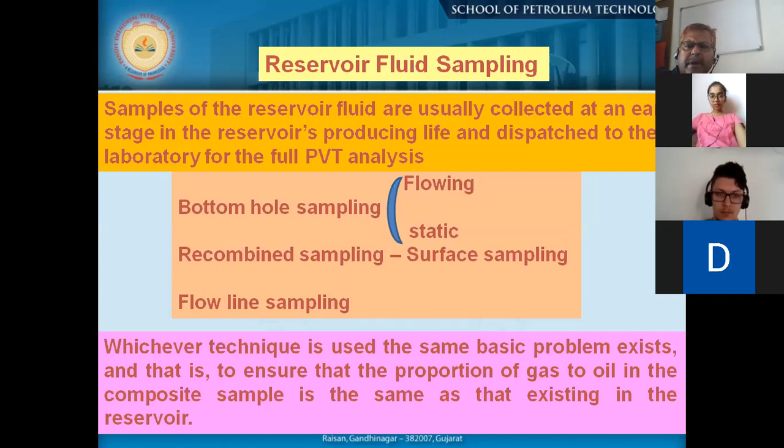So this is what we are collecting - how we collect bottom hole samples. One is during open hole. This is the formation tester, we have discussed this, but still some pictures are there, I'll show you.

As a geoscientist, you should not restrict your knowledge base only to geological understanding. You should understand as an engineer - you need to know what different activities are going on, because the core company may have different domains of expertise, but if you join a service provider company as an engineer, you should know the things in detail sometimes. Your overall understanding is very important.

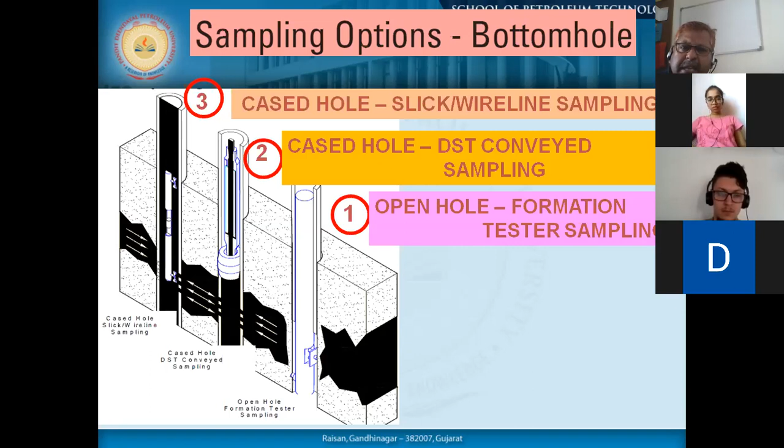So we collect open hole samples, we collect cased hole also. Now what is open hole sampling? I discussed this part in your last semester also, but I'm just trying to sum it up.

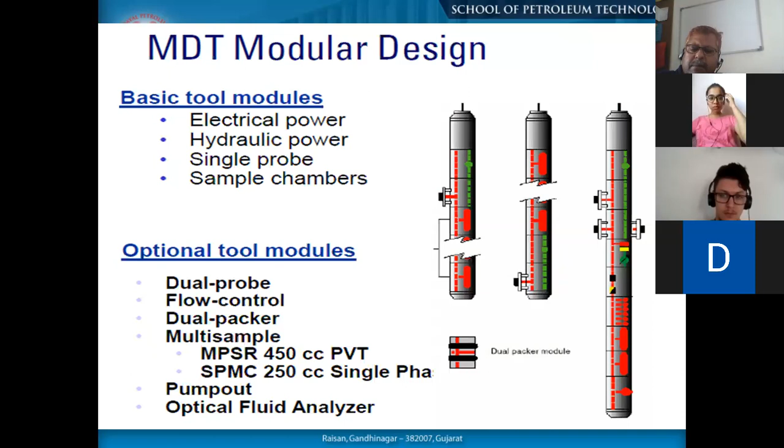This is actually your modular dynamic tester - the Schlumberger modular dynamic tester. These are module based, with a lot of complicated electrical circuits. We have the permeability measurement instrument, the pressure gradient measurement instrument, the PVT sampling, and bottom hole sampling. In the sampling figure on the right, you see so many sample modules in red - that means we could collect a lot of samples together when running down. This is the advantage of the modular dynamic tester, because we could even understand the type of crude present in the well. I'll try to show you that too.

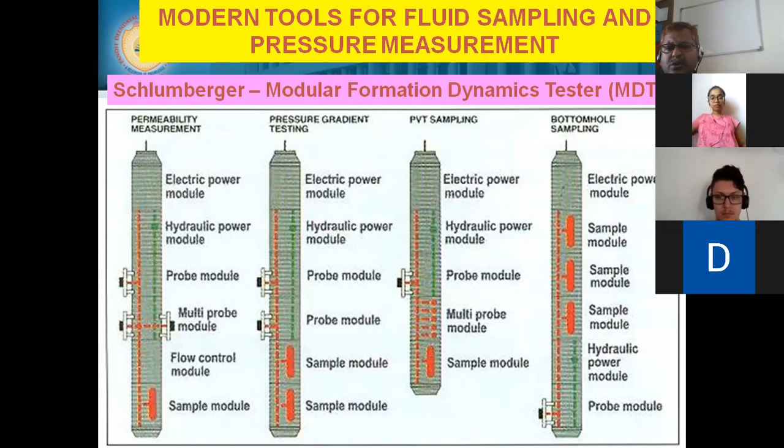So this is how you collect the sample. If you inject something into the fluid, that is called injection. This is called aspiration - aspiration means we take fluid samples from the formation. This is the domain where the formation is actually punctured, and your fluid will be collected. You have a strain gauge, and the CQG which is the quartz gauge to measure pressures, and you can test differently. I'll show you how we run this.

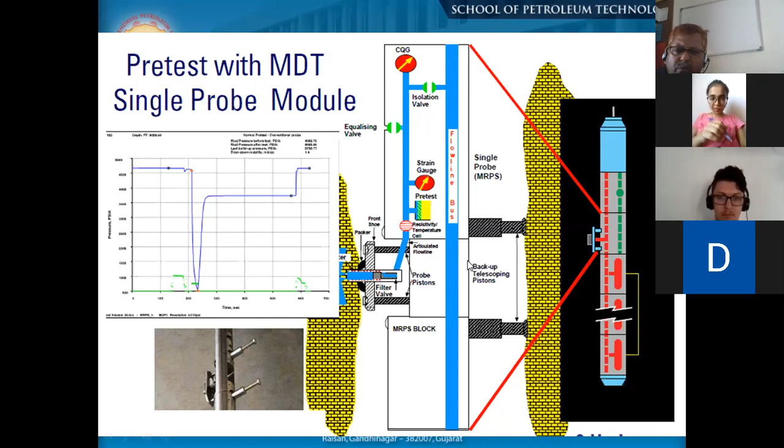So this is the multi-probe setup, meaning you may have a lot more probes. If you look at this figure, you can understand we have a formation, and we have different probes - horizontal probes, vertical probes - placed in different positions.

So when we collect some fluids from it, we get certain pressure response in other probes also. That gives us certain information about how, basically, when we are drawing down, how much actually is happening.

Hello Suman, is it audible? Yes sir. How many of you? Yes sir.

Okay, so this is what we do. This is a very sophisticated instrument, and the limitation of this instrument is you cannot test longer, and you cannot go beyond a certain domain.

So when we are testing for a very nearby area of the wellbore, what is the problem you may face? Any idea? Because during the drilling time we have damaged our wellbore surroundings, isn't it? So that means whatever fluid you are collecting may not be the proper fluid of the reservoir. You may be collecting a mixed fluid.

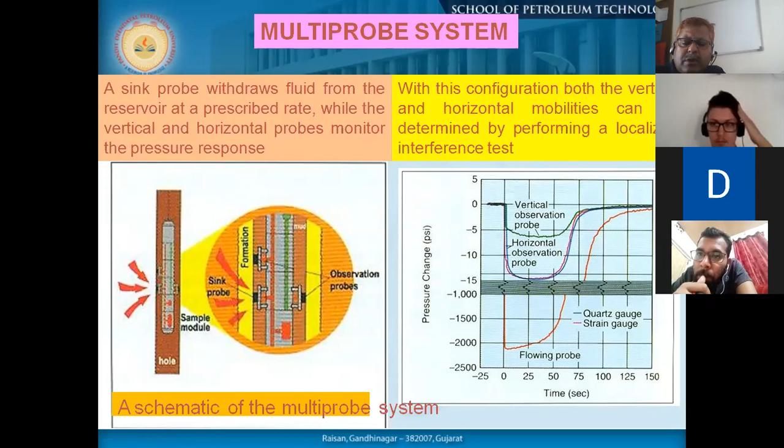That's why we have different modules also. This is called the pump out module. In pump out mode, you can get the resistivity value of the fluid entering into your instrument, and you can discard the samples. You can divert it into a sample chamber, but that you could do.

So in order to recover PVT quality samples, remember the samples we are collecting are not just for sake of sampling, it's for PVT. That means you need to know the proper PVT phase envelope, phase diagram, behavior, composition, every parameter.

So that's why through the resistivity measurement, we try to know which fluid is entering. How do you get this resistivity information? We have some resistivity sensors there.

And how do you distinguish whether the original fluid of the reservoir is entering, or we have some invaded or mixed fluid? Because we know the mud resistivity, isn't it? When we are drilling, we know the mud resistivity. So once you find the resistivity more or less similar to your drilling mud, that means the fluid entering into your sampler is not the proper reservoir fluid.

Okay, I'll just show you another diagram that may give you this. It's not there... okay, some resistivity values are there, one graph is there. It's not here, okay, but the resistivity values are there.

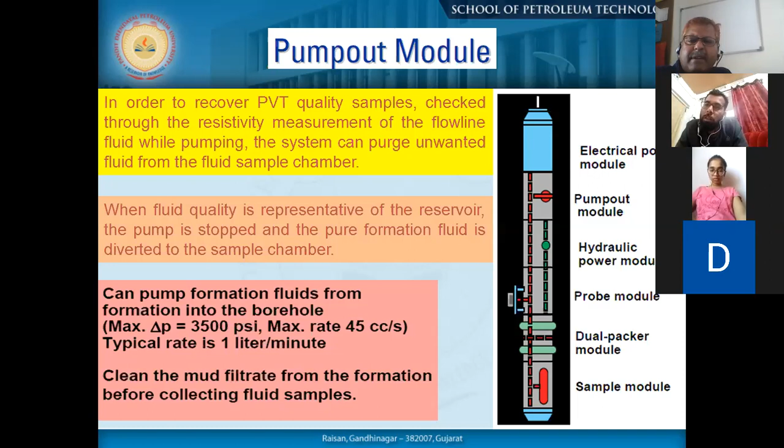So this is something you people may have to decide, because when you work as a well site geologist, the reservoir people may come to the field. Even today, if you ask somebody at the drilling site what is happening when this sort of instrument is lowered down, many people say, oh, the bottom hole party is doing something. Most people don't know what activity is happening or what information is being gathered.

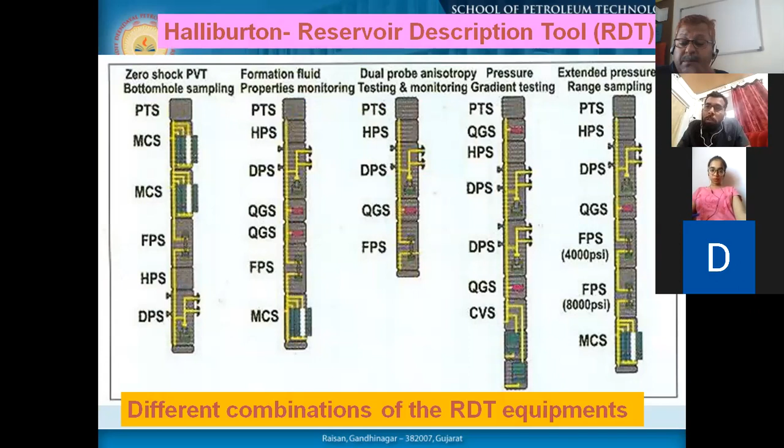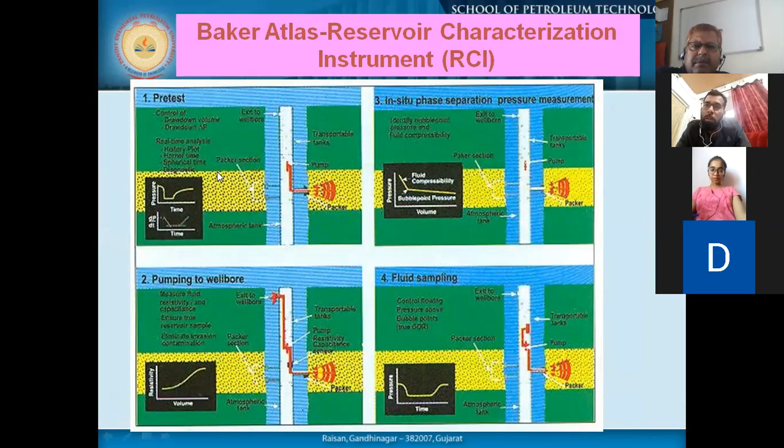So now here you can see all the tests, pre-test, before that the four diagrams are there. Then in situ phase separation, pressure measurement, you can get the pressure variations, because I told you we have a lot more sensors there, isn't it?

Okay, in the same instrument, on the right side, you have inserted your instrument into the formation, and now you allow the formation to flow in, and accordingly you get different pressure responses. That gives you the idea of, you see here, the last one is fluid sampling. So you are sending your fluid to the chamber.

So that means you need to take a call from the surface, because this will be displayed online on your screen, or maybe on the truck, which already has built-in computers, everything would be there, so that you need to monitor and take a decision. Now I should trap my samples in the full chamber. Got it? So this is what we do.

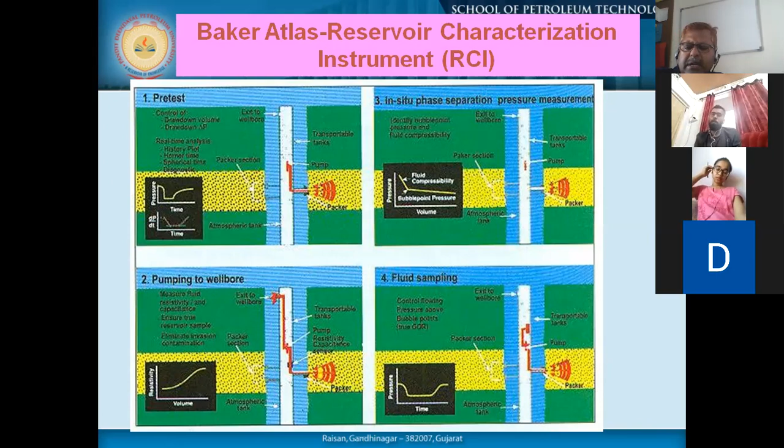Yes, and okay, so now a few things are there. I just didn't put it here. So now we could analyze the fluids also online by using spectroscopy. That is light oil, heavy oil, everything we could do. If you are interested, I have a book, I can send it to you. Sampling is the most complicated part. This generally I taught to the reservoir people, but if you are interested, I can send you all the materials.

Okay, so this is above surface. So now what happens after that? Once you collect with the modular dynamic tester, what is next? Because the modular dynamic tester is for open hole, if you remember. We case the well, cement it, then perforate it, and stimulate or activate it, and allow the well to flow. So now this is the setup.

Have you ever seen a Christmas tree? All yes, sir. Suman, have you seen it? No, sir. No, sir.

Okay, so this is actually, you have two zones. One is the production pipe going to the top, and another, you see, one side pipe is going, that is actually the annulus opening. Annulus, or maybe sometimes. So this is what is there, different valves are there. I don't know your production part, maybe it may touch upon this part after drilling and completion, isn't it? Hopefully so, you just have an idea, because you must know this, you never know when people will ask you a question. Even in an interview board, you cannot say that you haven't studied this.

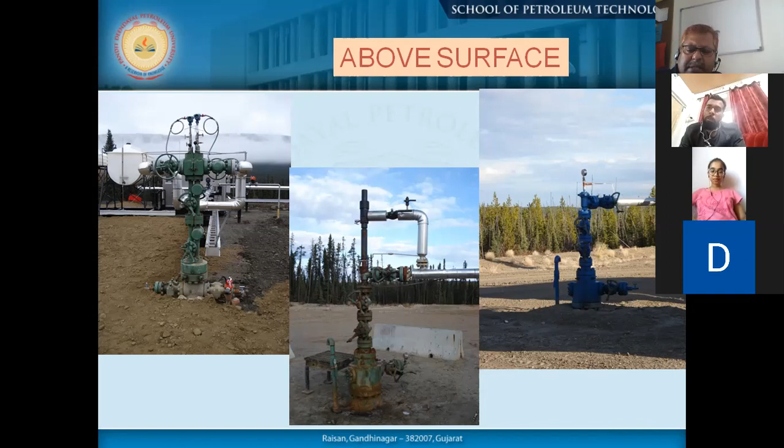Okay, so this Christmas tree, once above that, then what is done? So this is what we discussed earlier. Because once you allow the well to flow, the modular dynamic tester will collect only a few samples, not very suitable for the PVT study, because the sample amount is very small. So then we go for bottom hole sample collection.

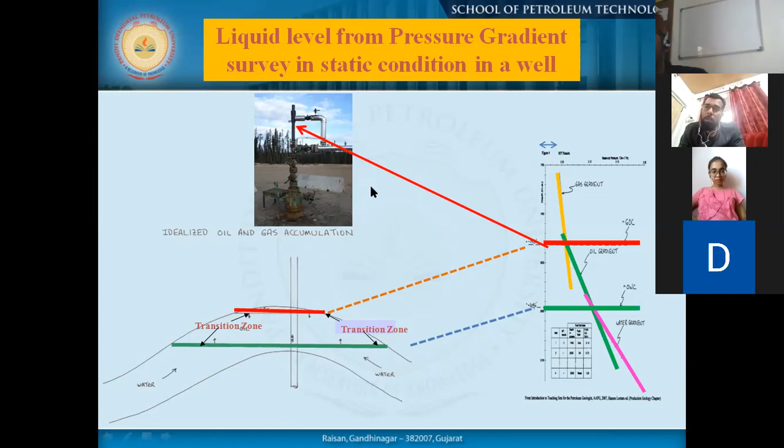Who generally does it? Who generally does it? Okay, so this is generally done by the reservoir people. So now this is subsurface collection of fluid samples, this is what is there, a sampler. I will try to send you another picture, because yesterday I was just searching many things and I got a few pieces of information.

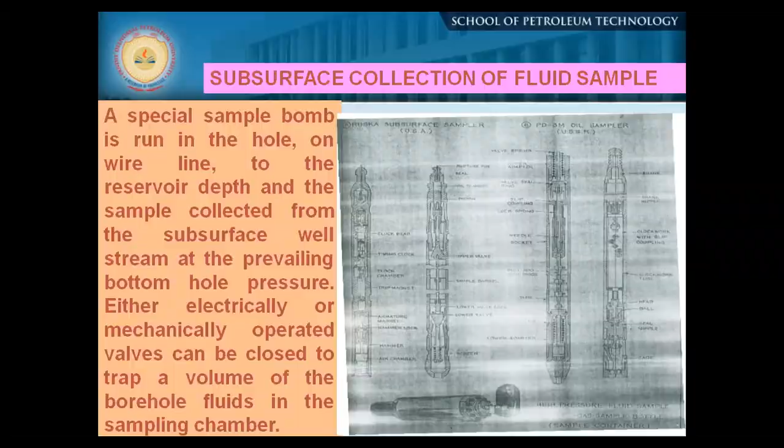Hi Abdul, why are you not visible? Yeah, now it's visible. Yeah, so some problem whenever... okay, visible now. Hello. Hello. Hello. Hello. Say anything. I can't see you, is it visible now? Yes sir, I don't know what is happening. Sometimes the data, overuse of data or something is showing, and that is going out.

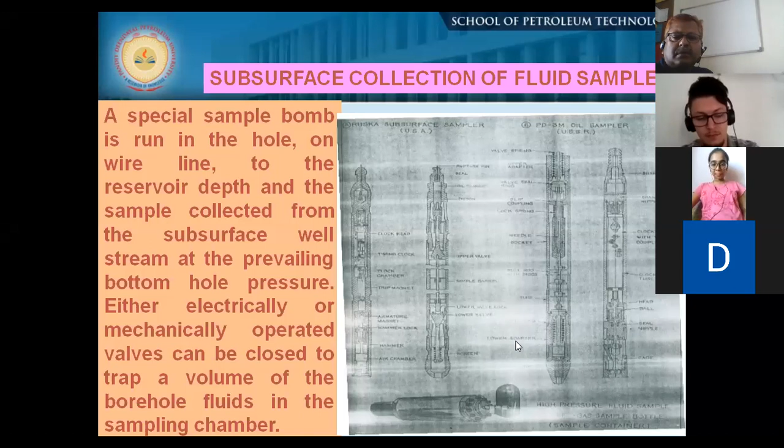Okay, so now the sample part. Then what do we do actually, in sequence. Okay, this, stop sharing.

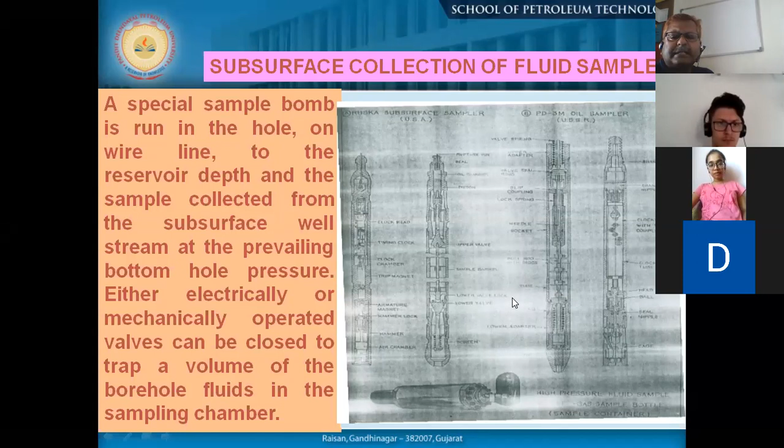Now, how do we test it? Any idea how we collect the samples? Okay, so this is actually the sampler. If you see, this is a mechanical sampler which I used when I was in ONGC. But I got a little information on an electric sampler, yesterday I just found out a few details, so I'll send you all that. So how do we collect the samples? Just anybody? Anybody? So what is the step for collecting a sample, a subsurface sample?

So what we do actually, initially, let's say this is the well, and this perforation is already there. Is it visible? Yes, sir. Okay. Now on top, this is a Christmas tree.

So we use our winch van. Here is the truck. And from the truck we have the drum, where we send through what is called a lubricator. Hopefully the pictures are there, I'll show you. Lubricator.

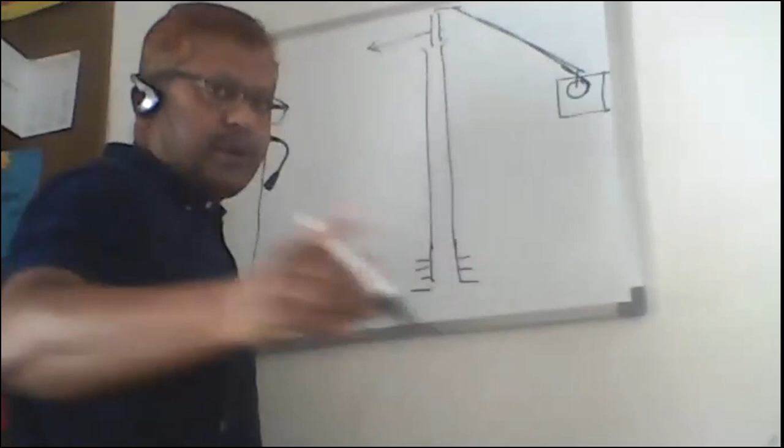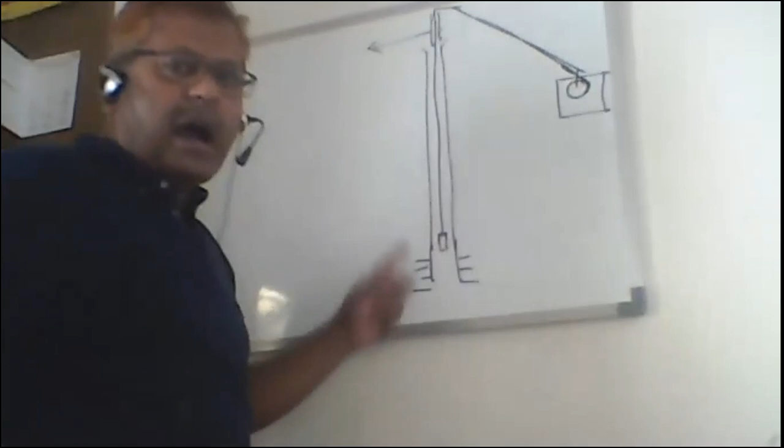Through it we lower down our instrument, the electronic memory gauge, up to a certain depth. How do we lower it down? In a very specific manner. Let's say I just set the time, and I lower it down.

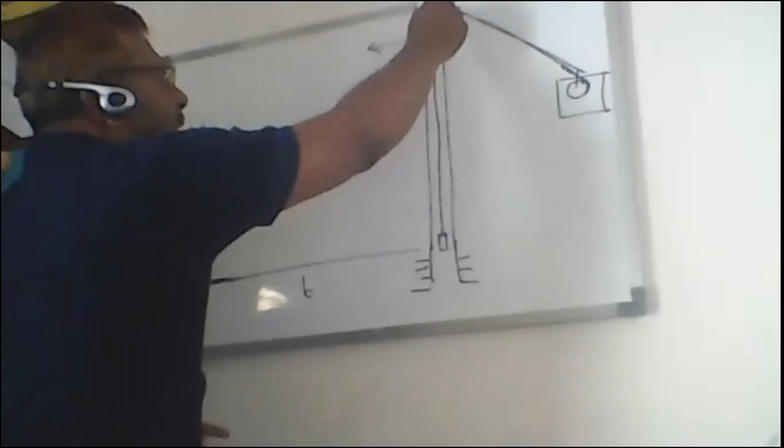So I just set the instrument first, then I lower it down slowly. Initially my pressure is like this - this is actually the pressure value. Now initially, before lowering, my pressure is 0.

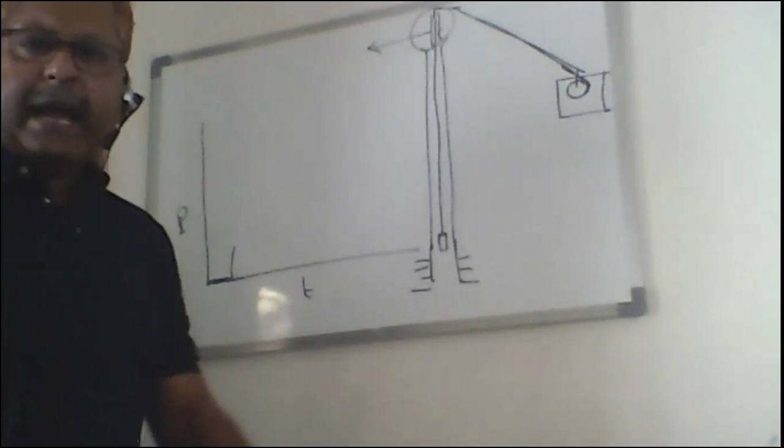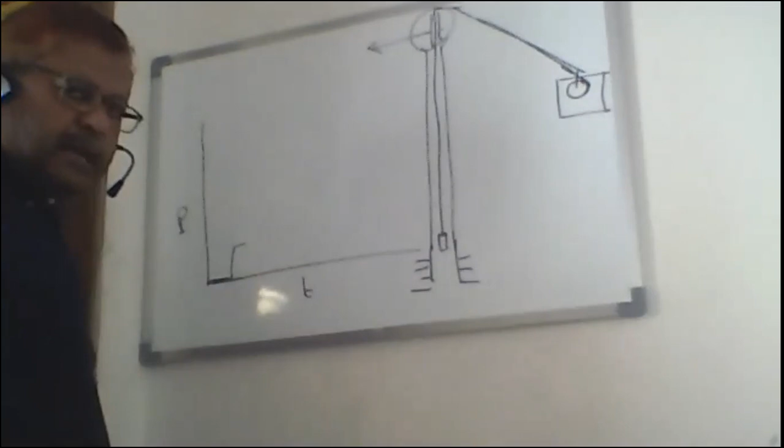Now suddenly I lower down up to 100 meters, and I keep it for 1 minute, and the clock will be running in this direction for 1 minute. Then I again lower down 200 meters, stop for 1 minute. Again I lower down. So like this, I lower down up to the desired depth.

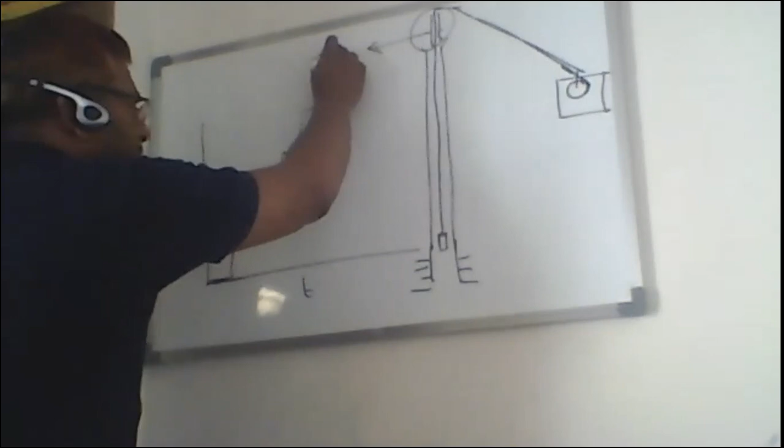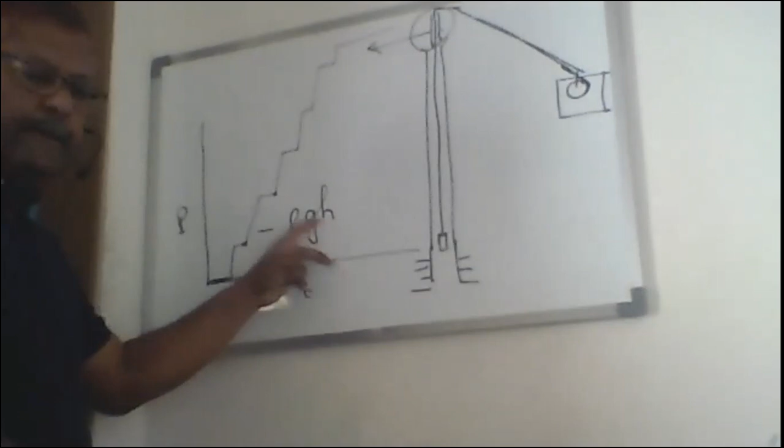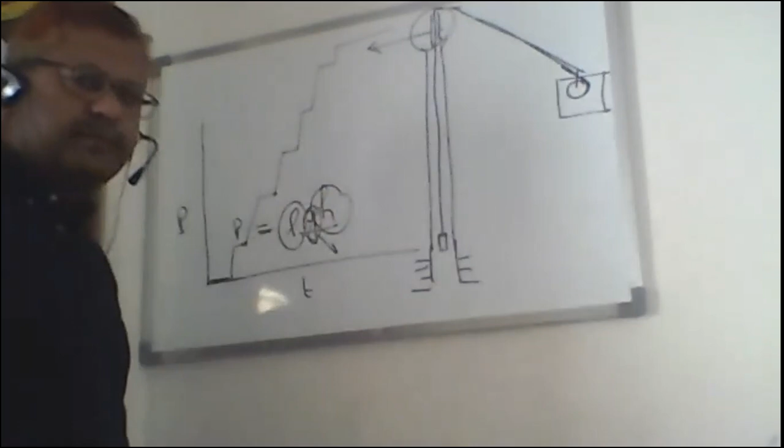So what is the value? Pressure? This is Rho, G and H. So that gives me - I know the H, I know the total pressure value measurement. So G is fixed, so I can get the Rho. What is Rho? Density, fluid type. That means if it is lighter, then I get the fluid.

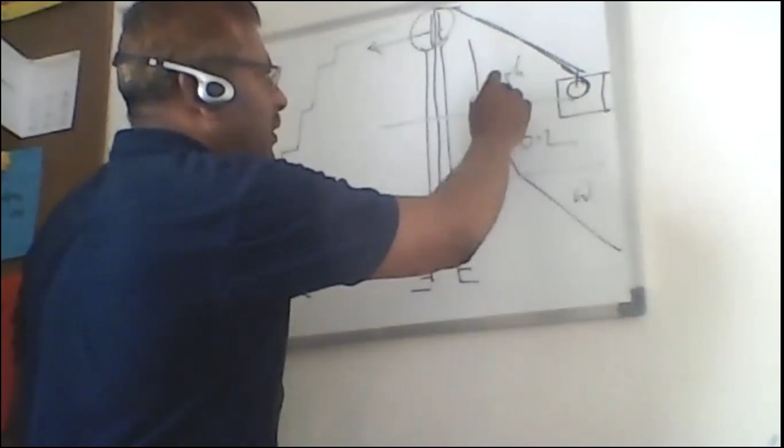So on that basis, I try to get this information in the well. So this is very less Rho, intermediate Rho, and high Rho. Rho GH - this is very less, this is gas, this is oil, and this is water. Got it? So this is how we try to get the information.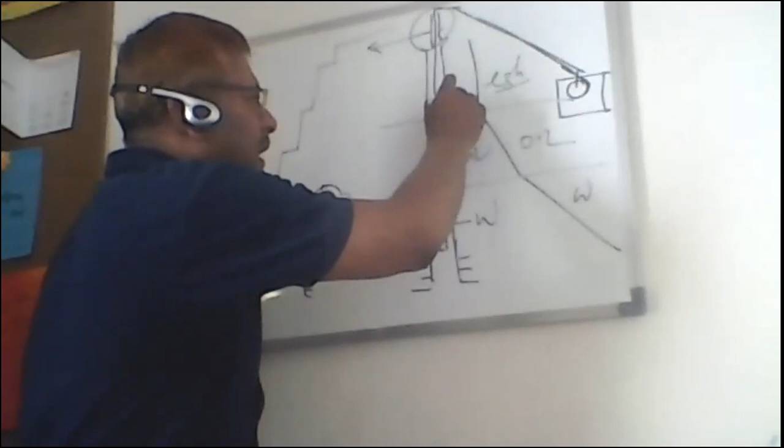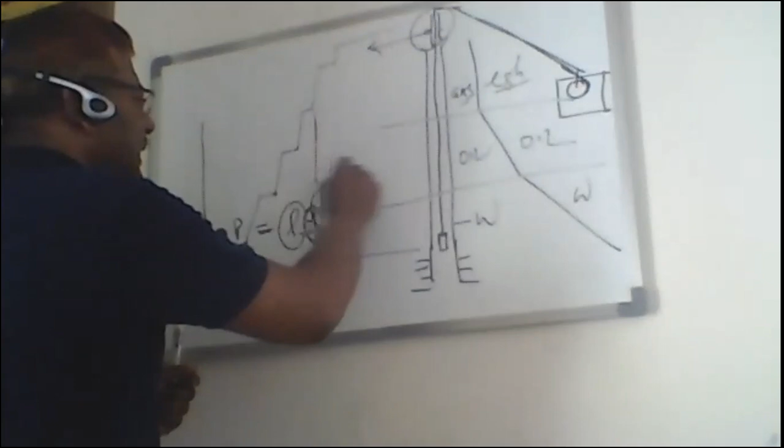Where is my water? What is my oil? And where is my gas, if it is there? If the THP, tubing head pressure, is more than your bubble point pressure like this, then... no, more than bubble point pressure means, let's say if this pressure THP, tubing head pressure, top pressure is here, so definitely you will be in single phase, so you won't get gas here, isn't it? Because gas has not evolved up to that.

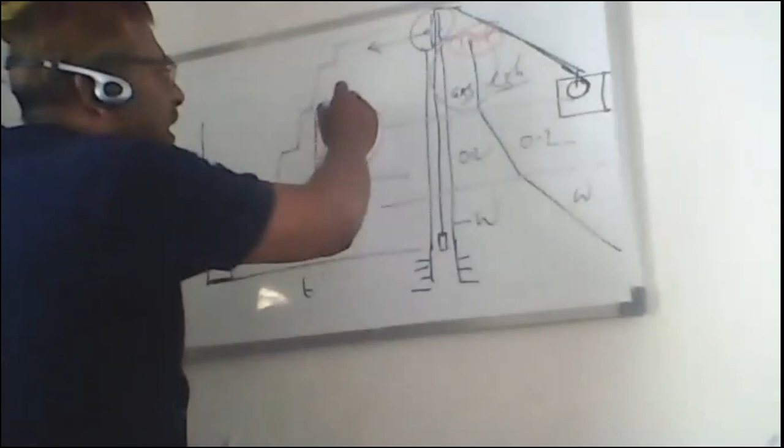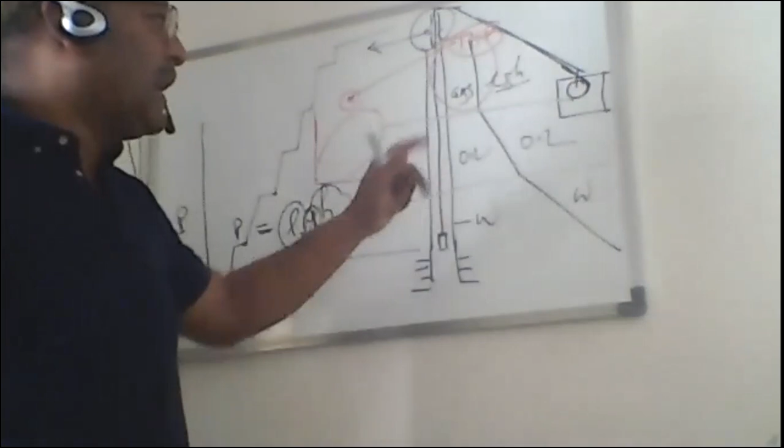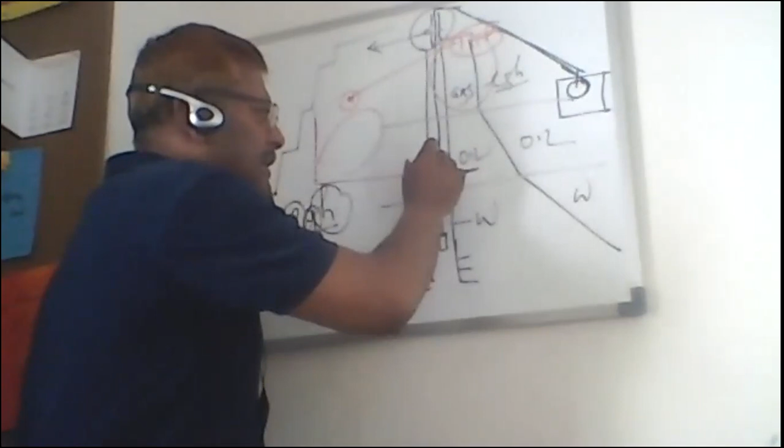Evolved, yes, not evolved, because the THP is higher than the bubble point pressure, so that means you will get only a single column of oil and water if water is there. Now you tell me where from you will collect samples. Two situations - one is whole oil, another is gas. In case of oil, if you collect above the transition zone, that means you will be getting higher pressure crude oil samples, isn't it?

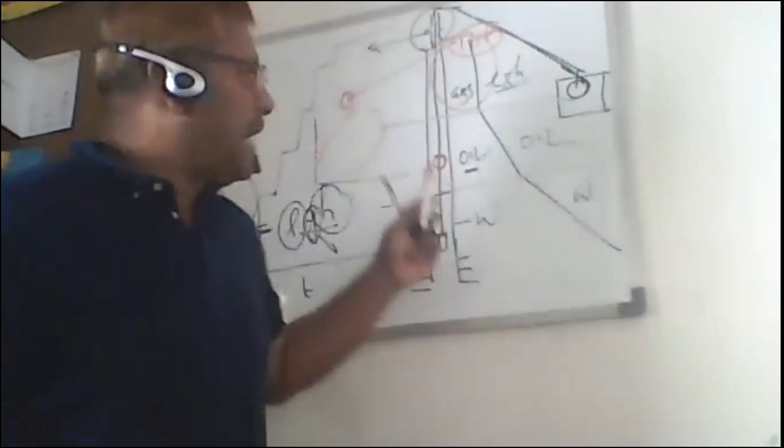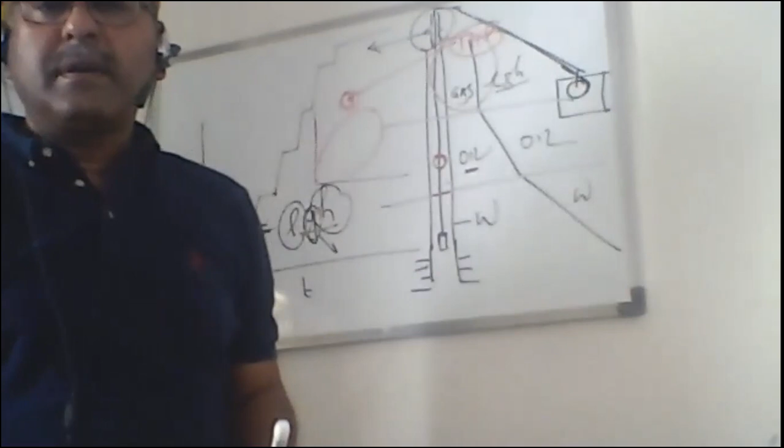Fine, sir, can you repeat the last point, because I couldn't hear anything, there is a problem in the connection. If you can repeat the last one.

So you see, if the pressure of the tubing head pressure is more than the bubble point pressure, so no gas will be evolved in this, isn't it? Yes. So we'll get only a single column like this, oil and water. If the THP is here, then we may have some evolved gas also. So in this case, we'll get a slope like this.

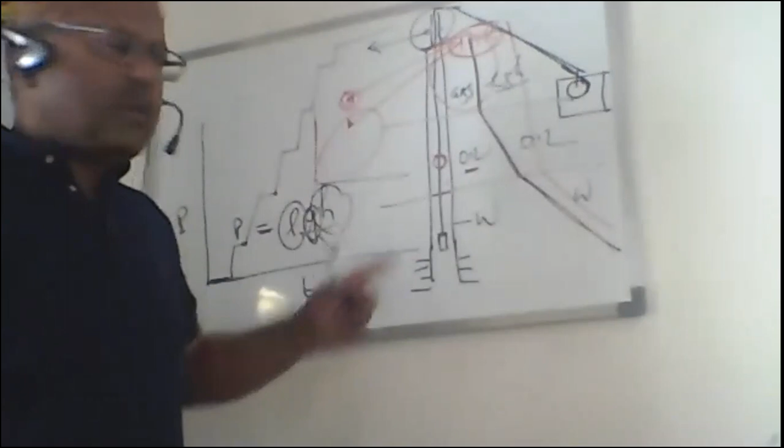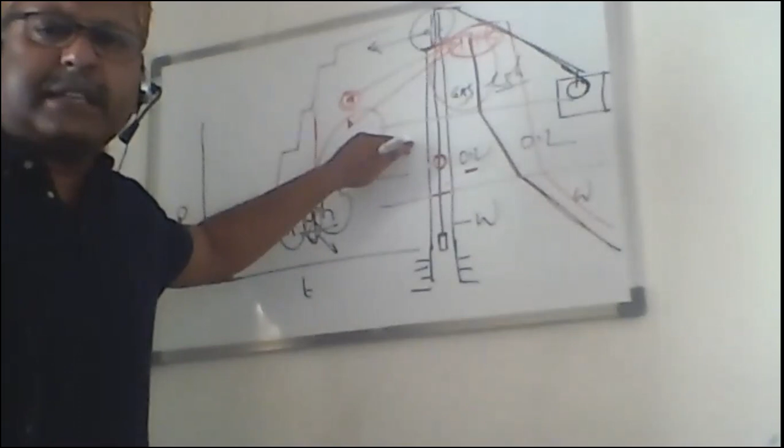Okay, so now where from you will collect your sample for PVT? For PVT, sir, oil. Yes. Where from? Where will you send your sampler, up to this level? Not here, because it would be water. Yes, sir, we have to collect the samples from here only. Got the idea? Yes, sir.

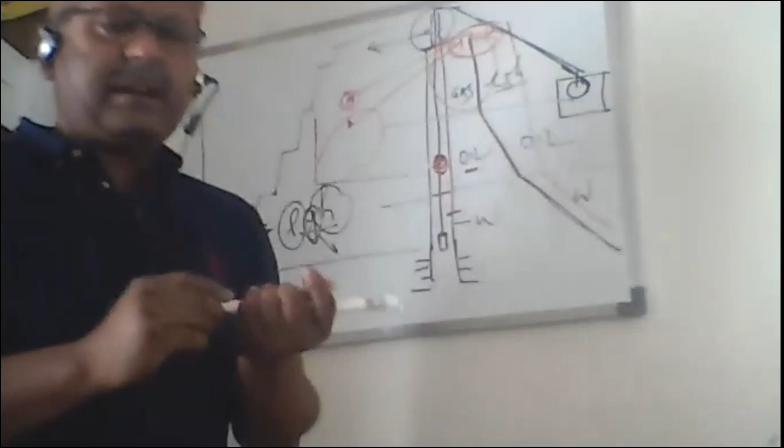Okay, so this is how to collect bottom hole samples. So that means we need to collect samples. Okay, so now...

So now bottom hole samples, wellhead samples, and surface samples. Okay, so now it's clear how we collect the recombination samples, the surface samples - what we have to collect from the separator.

Got it now, clear? From the beginning, we are collecting different fluid samples for our different activities, particularly for PVT study. And this PVT study - hope you remember the different PVT tests: flash liberation, differential liberation, then constant volume depletion, separator test - all we are doing for our different understanding of crude behavior. So now this operation part is clear, how we collect samples.

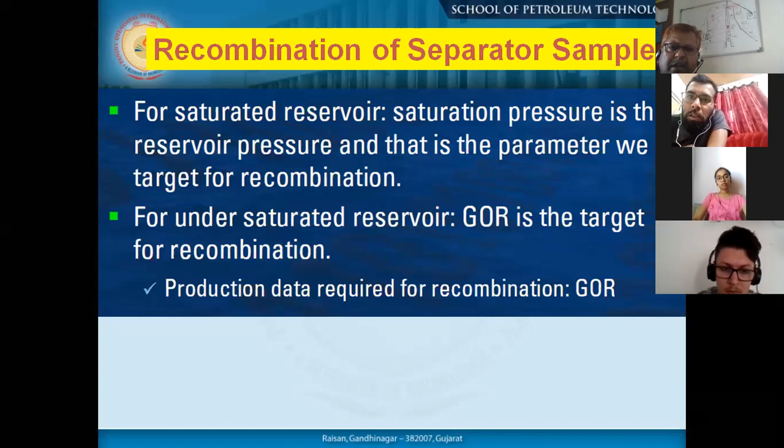Yes or no? We don't have much time, so maybe I'll just explain. So how do we recombine? You see, recombination means we go for volume estimation or volume measurement in the reservoir or maybe in the surface separator. We collect the samples in volumetric proportion and put it and recombine it. How to recombine? Like this, it's a recombination setup.

We mix it and char it. This is the recombination cell, and we have a pressure gauge. We can also increase the temperature so that the reservoir sample is at reservoir pressure and temperature value. Once we mix it, what we get is samples, even surface samples, above your bubble point pressure and temperature. So that is how we are preparing samples from surface, mixing proper production volume, and then bringing it to high pressure and temperature, reservoir pressure temperature, to make a homogeneous reservoir sample.

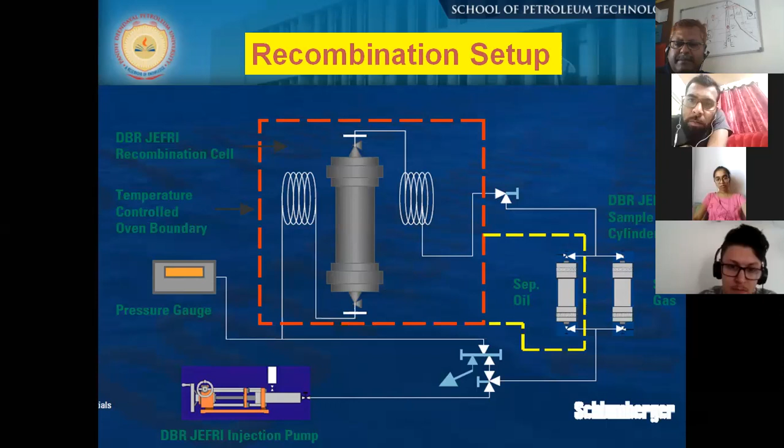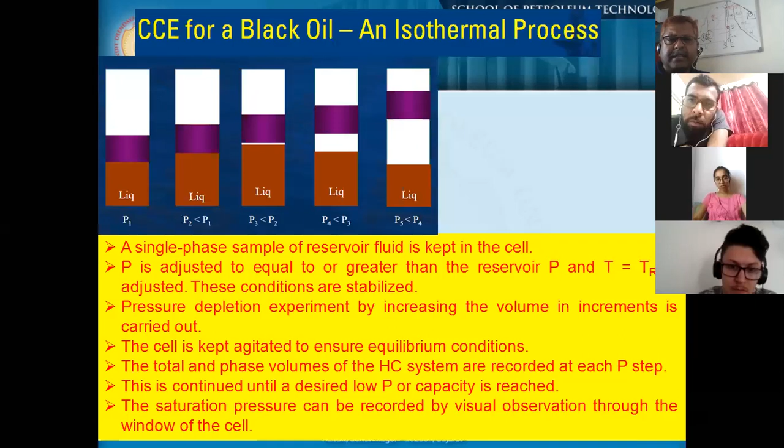Now, constant composition expansion - this you already studied last semester, I hope. This is constant composition, so the composition is not changing. Here is the liquid. We decrease pressure and observe it at each and every point, and then we try to get this graph. This is for constant composition expansion.

I think we can't hear anything, sir. You cannot? Okay, let me just repeat it. Okay sir, repeat this part. Okay, screen share.

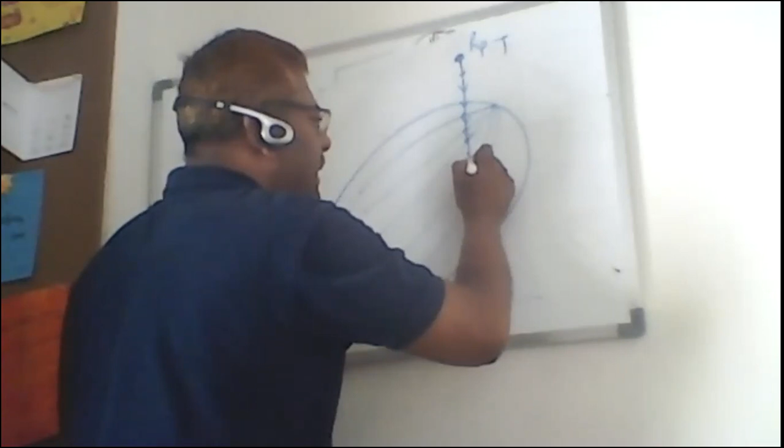So what is your idea about phase envelope? What we discussed so far in normal classes, phase envelope - we don't get it like this for our own samples. This diagram is drawn for our understanding, but for normal cases, let's say we got our samples here, and this is the reservoir pressure temperature condition. We take our PVT cell into that pressure temperature condition and get a line like this only. We don't get the other part. Are you getting my point?

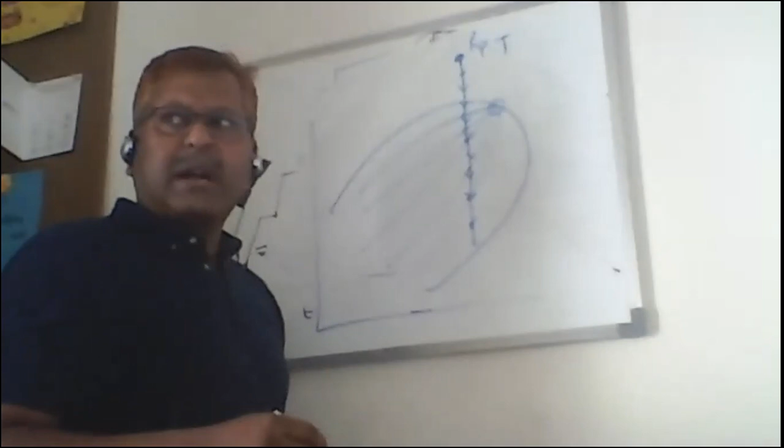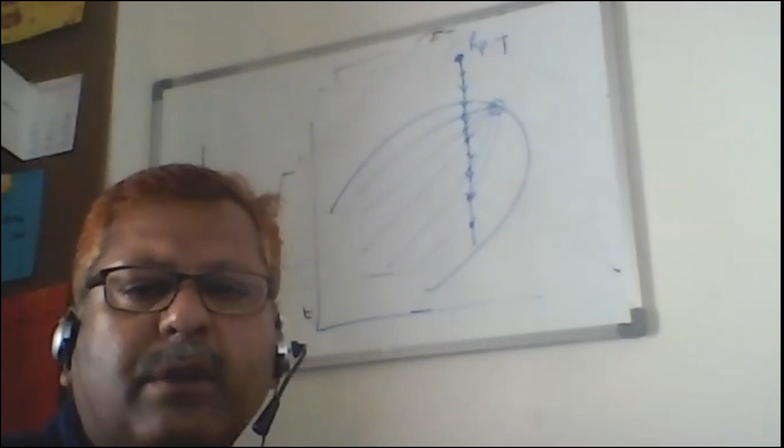It is not the whole phase envelope we get. We can get the critical point and we just do like this. That is how we build our understanding about our own reservoir fluid in PVT, and from that we calculate whatever parameters are needed.

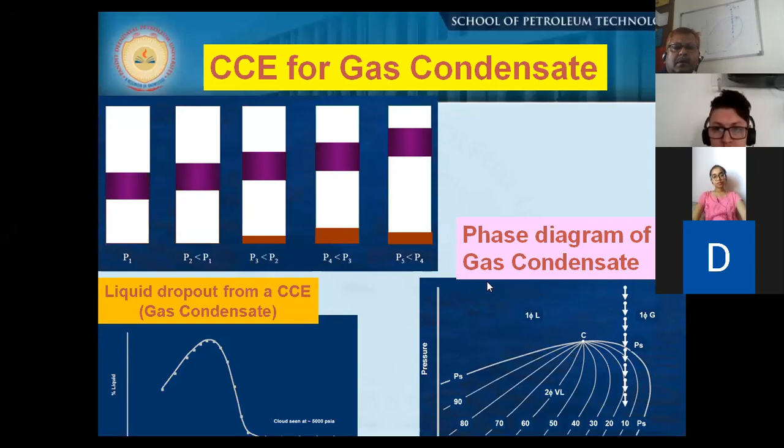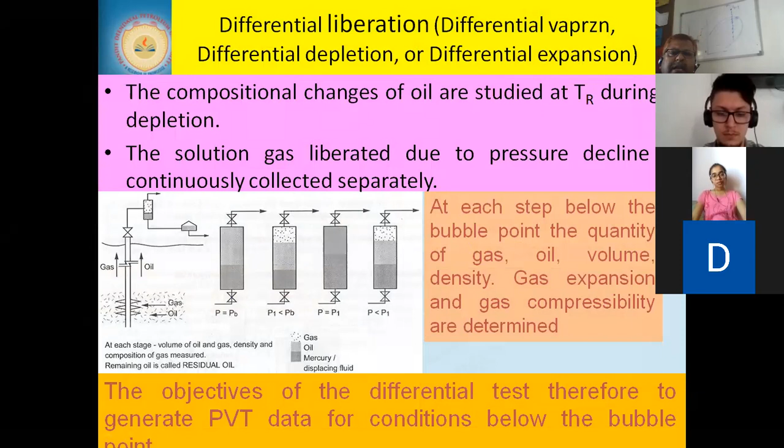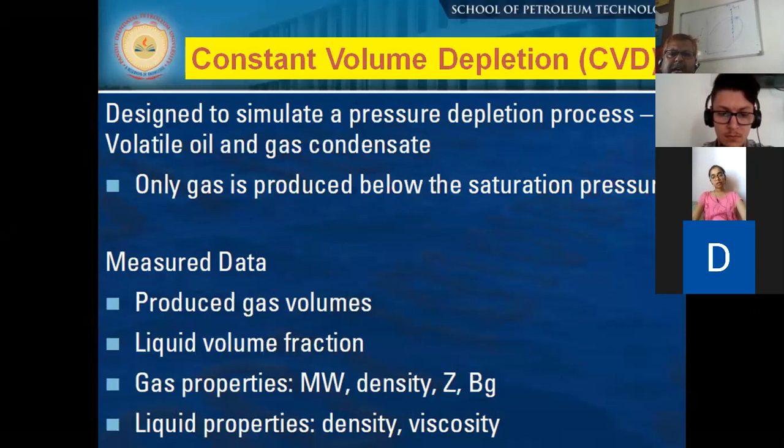The slides are not okay. So for differential liberation, what we do is take out the gas, and do each and every step. This is how we try to get different values of Bo, Bg, Rs, Rv - every parameter we get it. This is how, for each and every sample we collect, we get the parameters.

Why do we do constant volume depletion? Anybody? It is written here in the constant volume depletion section - what is it? Pore - how it would behave at the pore scale. So how it would behave in a pore scale can be easily understood by this.

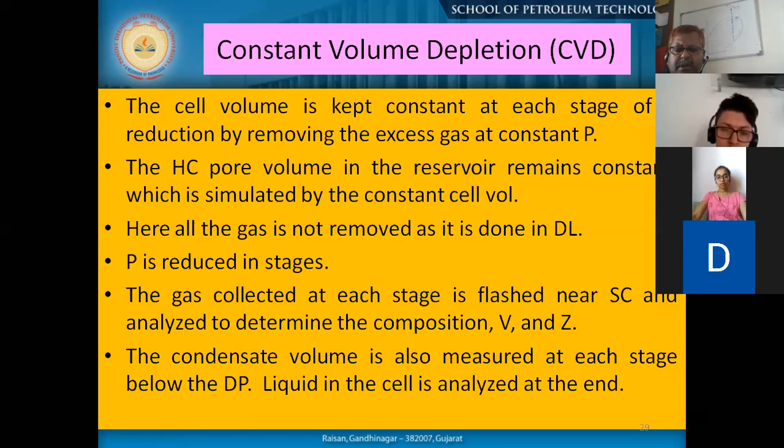That means how a pore behaves, because if you remember our fluid equations, when we discussed the equations, particularly the two-phase and three-phase relative permeability graphs, the values are generally changing. To understand that part - because ultimately we need to predict the flow behavior of the crude oil with time, how the reservoir will behave, how the crude will behave, what is the production rate with time - that we need to understand. That is how our PVT parameters are important. We could do the separator test, which is generally done by the production people, but we need to know it for our own activity - how this fluid will behave with time.

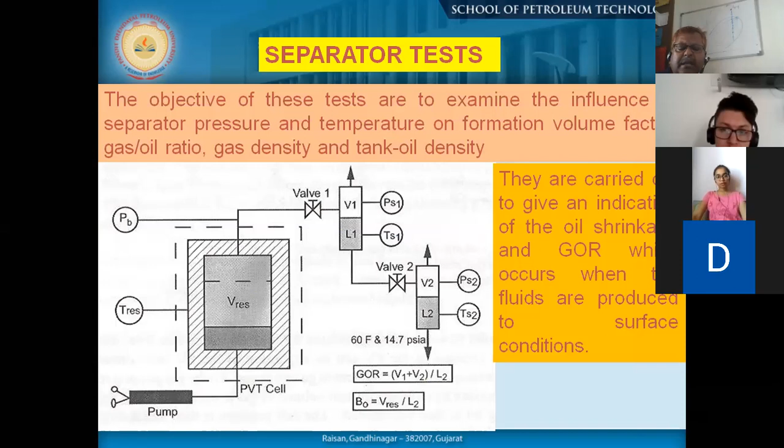This is a schematic. So, got this idea or not? Now if you have any questions, you can just ask me.

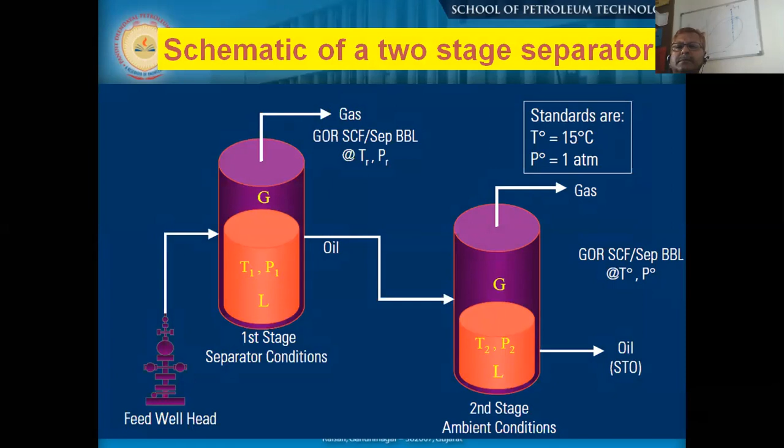Suman, are you there? Yes sir. Okay, so how many of you joined today? Four. Okay, four. So any questions out of this?